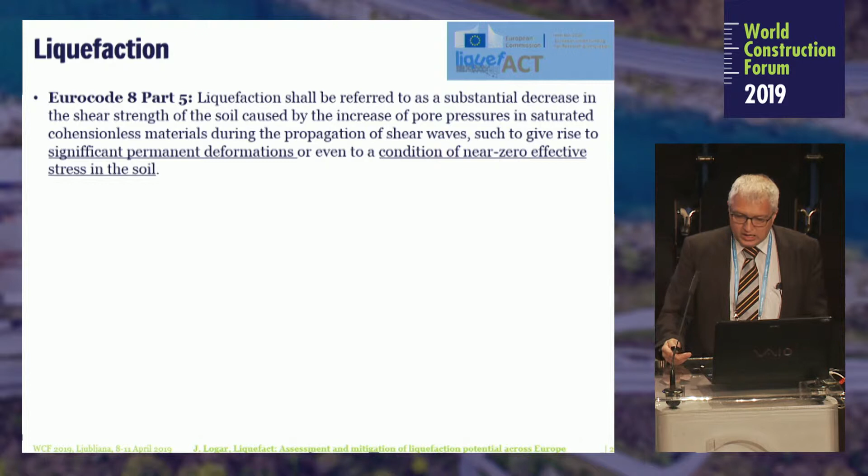As civil engineers, maybe we should look to the Eurocode for the definition of liquefaction. The Eurocode says that liquefaction shall be referred to as a substantial decrease in the shear strength of the soil caused by the increase of pore pressures in saturated cohesionless materials during the propagation of shear waves. Basically, in most cases this is an earthquake, giving rise to significant permanent deformations, which we'll see on the figures later, or even to a condition of near zero effective stress in the soil, meaning that soil literally becomes a liquid, maybe just for a fraction of time.

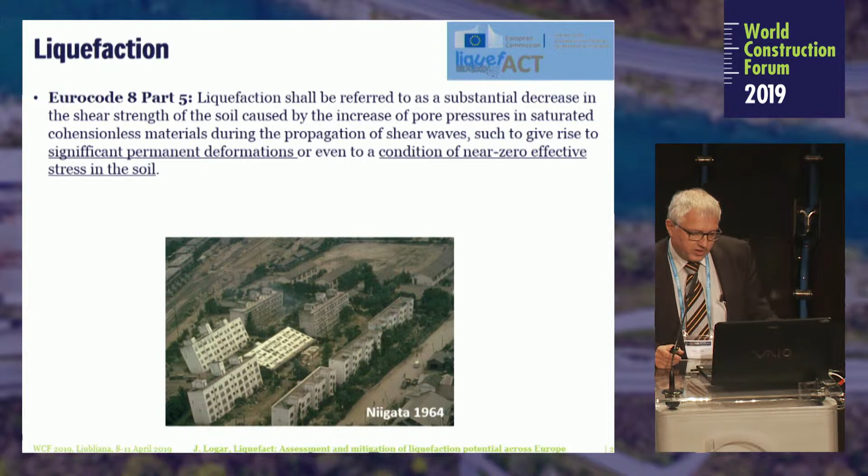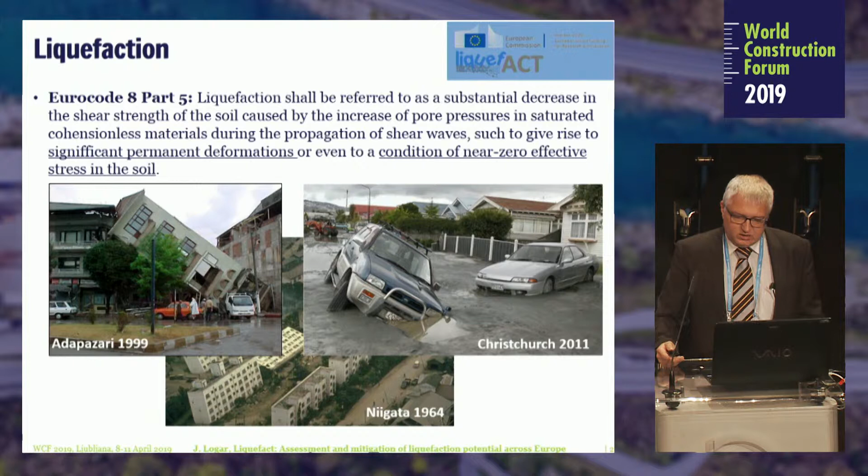Maybe this is one of the most known photos of liquefaction phenomena, from the Niigata earthquake in Japan in 1964, but we have more cases from recent earthquakes. For instance, maybe the most known and most investigated is Christchurch in New Zealand in 2011, then Turkey, and there are other liquefaction manifestations during recent earthquakes, for instance in Hokkaido Japan, in Fukushima Japan, in Emilia-Romagna Italy in 2012, and maybe you have observed the dramatic liquefaction phenomena in Palu, Indonesia during the Sulawesi earthquake last October, or end of September maybe, where literally a flow of liquefied soil demolished a large area in Palu.

It is a devastating event.

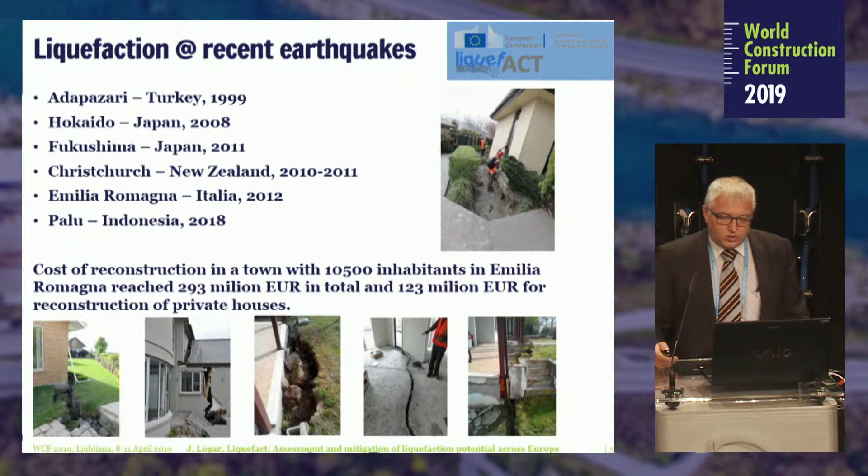Just as a case, in a small town with over 10,000 inhabitants in Emilia-Romagna, the reconstruction costs reached nearly 300 million euros in total, or over 120 million just for the reconstruction of private houses. So the cost of such an event, or the damage, is huge, and what does the damage look like?

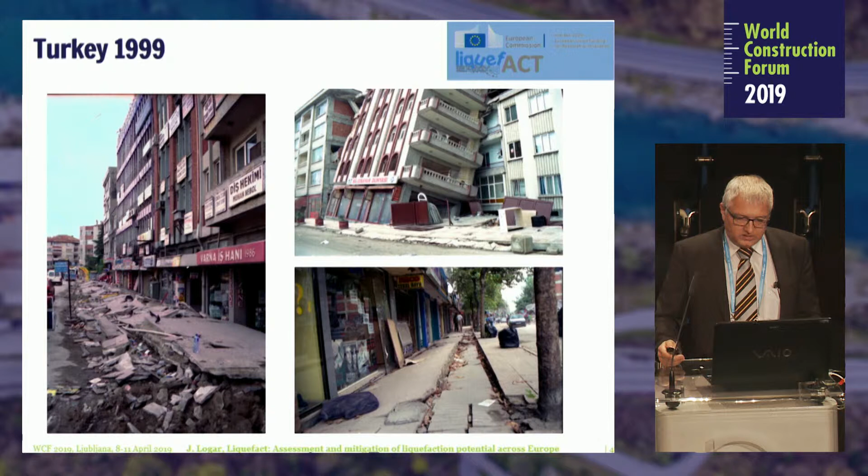So it's basically tilting, overturning of buildings, it's settling of buildings, and it's heave of the ground adjacent to buildings. And here you have always a man standing in front of the houses, so you can see how large settlements can occur.

during earthquake. So more than enough motivation for the LIQUEFACT project, whose goal is to develop a comprehensive understanding of liquefaction disasters and applications of mitigation techniques, those already available and some new ones being developed, and, as I will show you, to increase community resilience to earthquake-induced liquefaction disasters.

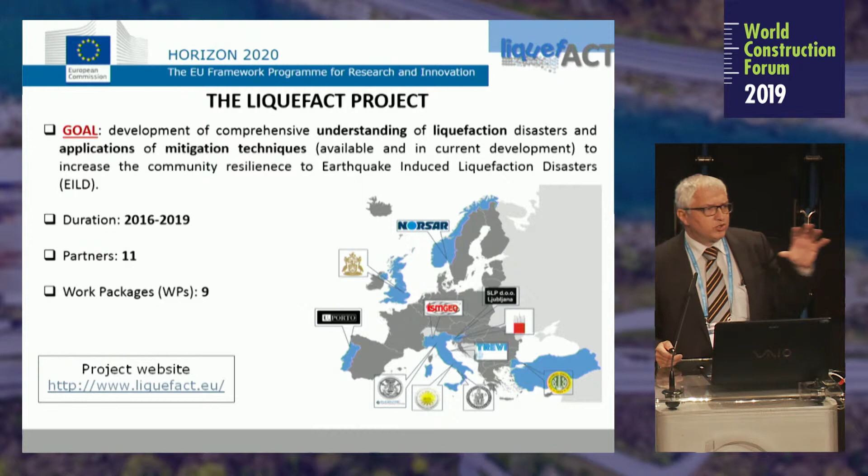So the project started in 2016 and will be completed in October this year. It involves 11 partners from Norway, UK, Portugal, Italy, Slovenia, and Turkey, and it is organized in 9 work packages. I'm going to briefly present the 6 technical work packages.

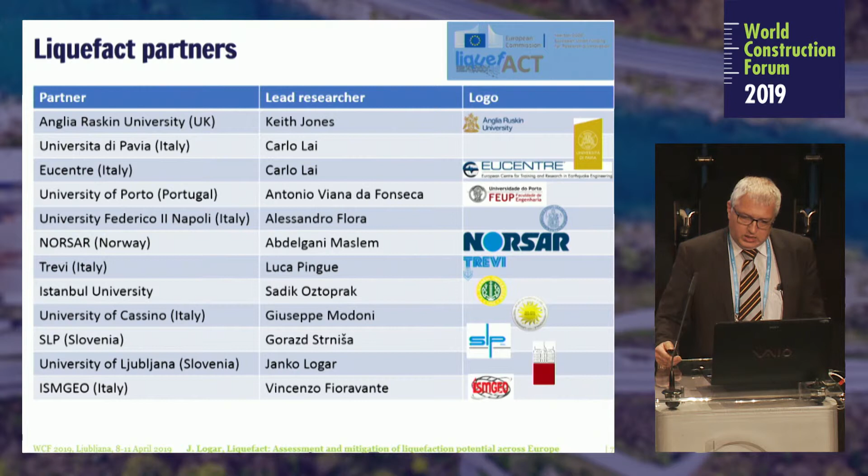Here are listed all the partners with lead researchers, so if you look for publications coming from this research, you can use this list. The sequence of work packages is such that the first deals with hazard, then with the vulnerability of structures, and so on. So let's go through.

The first technical work package deals with the European liquefaction hazard map, so the macrozonation process on a European scale, and methodology for localized assessment of liquefaction potential on a local scale.

In the framework of this work package, ground characterization on 4 different sites in Europe was performed: in Emilia-Romagna region in Italy, in Lisbon area in Portugal, in Brežice area in Slovenia, and Marmara region in Turkey. One of the tasks was also to produce a catalog of historical liquefaction occurrences in Europe, and then a European liquefaction hazard map is being produced. A validation of this map will be done for the 4 investigated sites within the project.

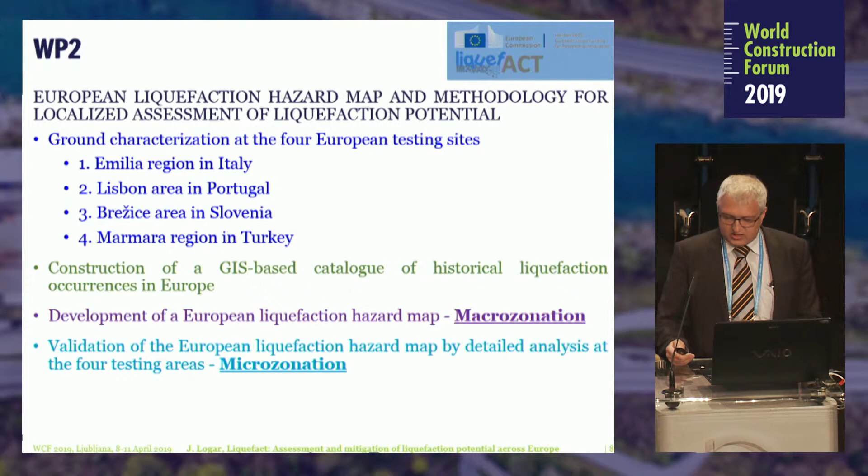So this is a map of historical liquefaction occurrences in Europe. Probably it's not surprising what these dots are, but maybe it's interesting to observe that liquefaction can occur at magnitudes as low as 4.5, and we have many evidences at earthquakes of magnitude around 5 to 5.5.

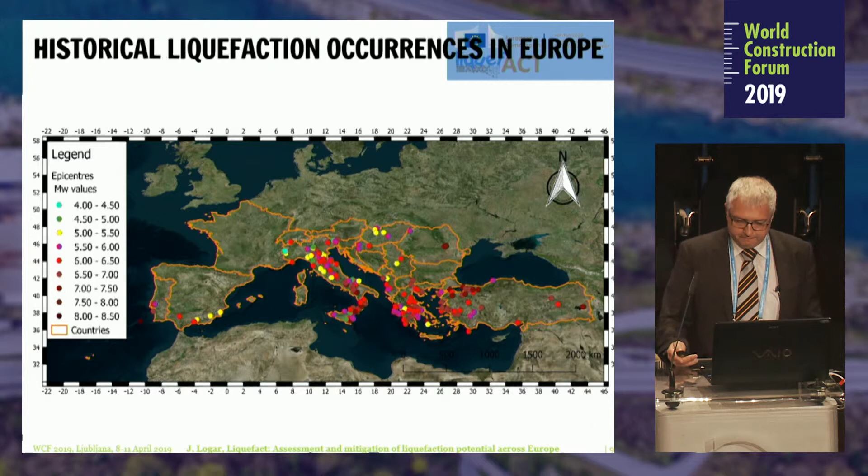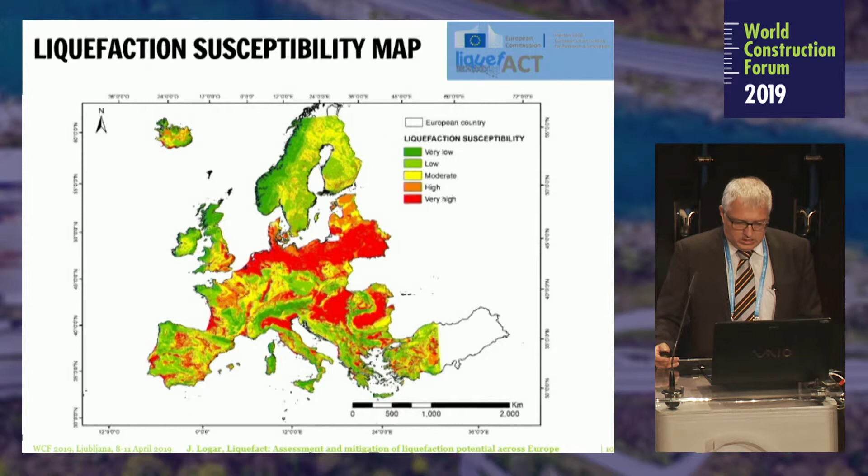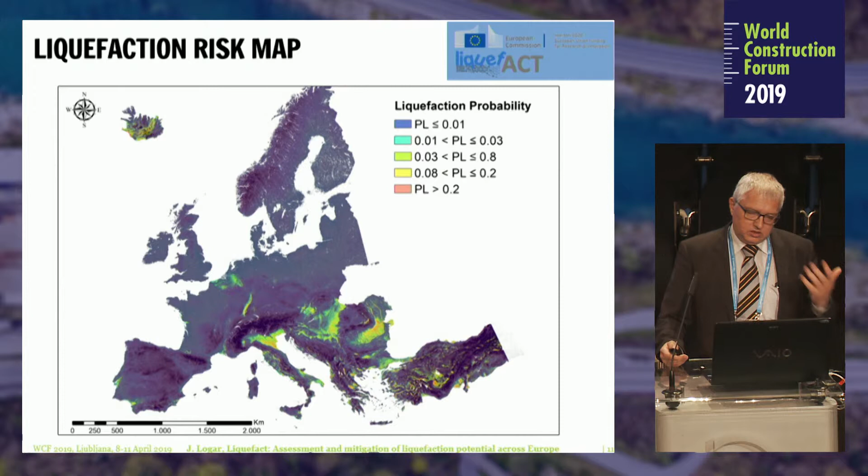One of the outcomes is also the liquefaction susceptibility map. This map does not involve the earthquake hazard, it's just the susceptibility of the ground. And here, if we combine the seismic hazard with the liquefaction susceptibility map, we get something like this. This is not the final version; the methodology is still being worked on and improved, so the final version will probably look a little different, but nevertheless, the higher liquefaction probability is shown in places where evidences of previous liquefaction manifestations were found.

Then the microzonation is done for the 4 sites in such a manner, so maps will be produced in terms of liquefaction potential index or liquefaction severity number as indicators for liquefaction.

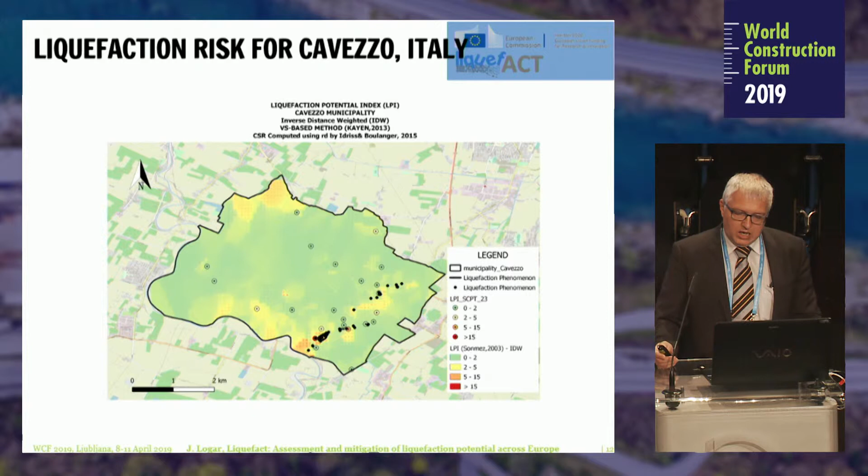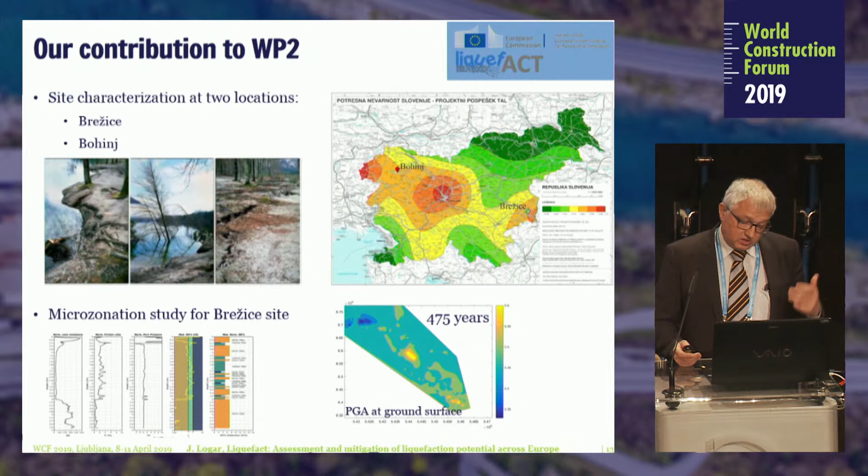Our contribution, the Slovenian contribution to work package 2, was the site characterization at 2 locations in Brežice and Bohinj, where we investigated ground potentially susceptible to liquefaction. In the Bohinj case we had a hypothesis that in the recent earthquake, the crack along the lake shore was produced by liquefaction, which turned out to be very unlikely. And then we have done, or are doing, the microzonation study for the Brežice site.

The next work package deals with structural liquefaction resilience and vulnerability assessment methodologies. The main objectives and tasks are to develop efficient numerical procedures for the simulation of liquefaction-induced damage in critical structures and infrastructures.

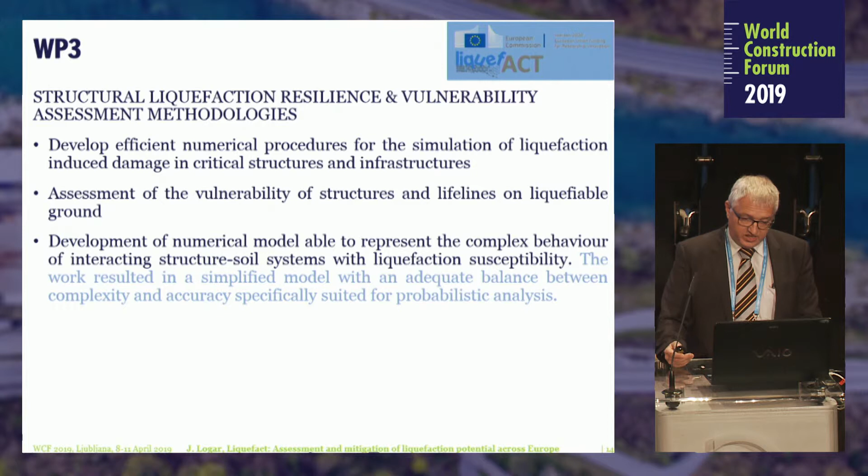The assessment of the vulnerability of structures and lifelines on liquefiable ground, and development of a numerical model able to represent the complex behavior of interacting structure-soil systems with liquefaction susceptibility. So basically, the vulnerability of structures was being studied.

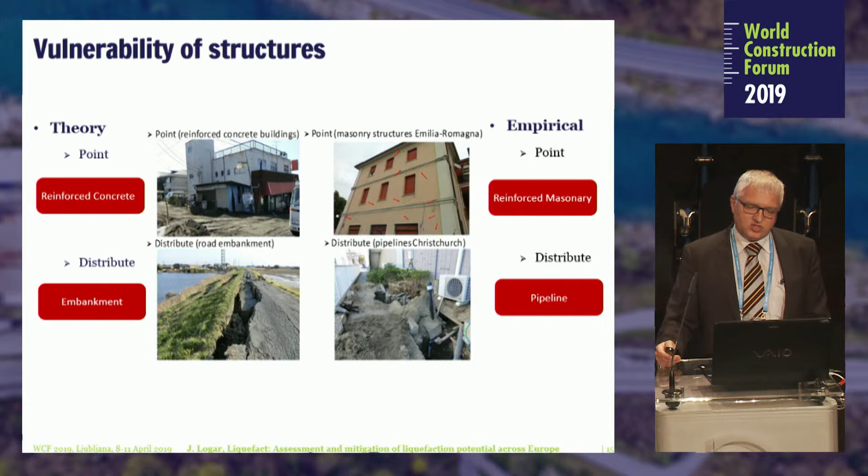Mainly four types were studied: two structures, reinforced concrete and reinforced masonry, and linear lifelines, so embankments, traffic lines, and pipelines. The reinforced concrete structures and embankments were dealt with theoretically or numerically, while the masonry structures and pipelines had their vulnerability to liquefaction assessed by empirical evidence coming from the Emilia-Romagna region for masonry structures, and from Christchurch for pipelines. I'm afraid I'll have to skip this one.

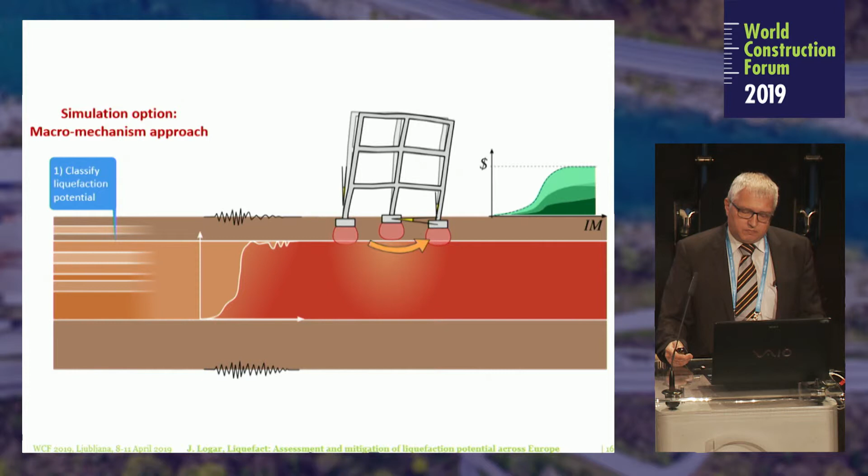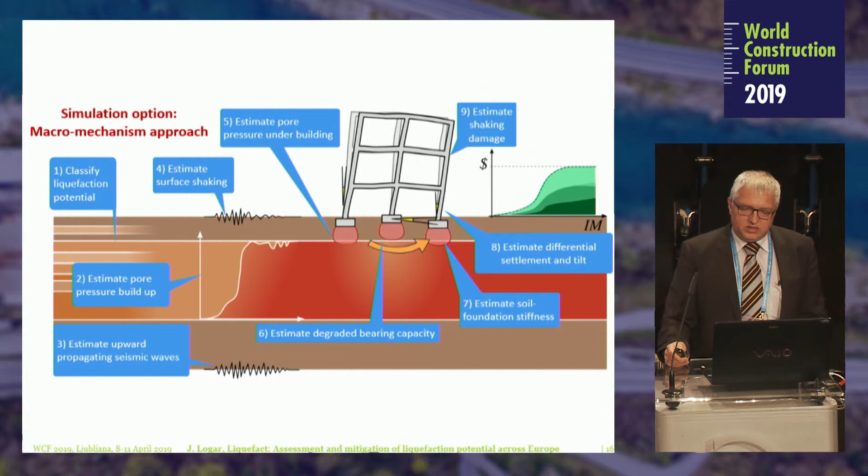One of the tasks that required the most time from the researchers of University of Porto, who led this task, was to come up with a macro mechanism approach to study building behavior or vulnerability of buildings on liquefiable ground. So they distributed the task into sub-models or macro models in order to arrive at the fragility of structures on liquefiable ground.

Our contribution to work package 3 was to assess the vulnerability of traffic embankments on liquefiable ground, and structural colleagues designed a simplified method for rapid risk identification of soil liquefaction and structural damage, using response history analysis and a simplified nonlinear model. It is a relatively simple model, but with nonlinear ground response and nonlinear building behavior, and the aim is to make a rapid assessment, to answer the question: do we have to study this structure in more detail or not?

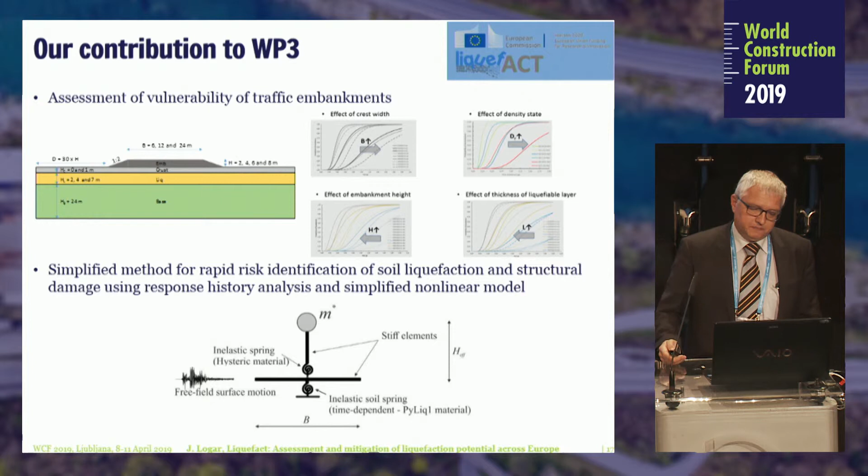Work package 4 deals with mitigation measures, and I like this work package most, although we don't participate directly. The colleagues from University of Napoli Federico II, exactly where our keynote speaker comes from, studied treated soil in the laboratory on samples, in small-scale centrifuge tests, and in full-scale trials on a selected test site in the Emilia-Romagna region.

And then, of course, some numerical work was done to combine all the results into a single set of conclusions. The studied liquefaction mitigation techniques were horizontal drains and induced partial saturation as new developments, and vertical drains as an existing popular measure to counteract liquefaction risk.

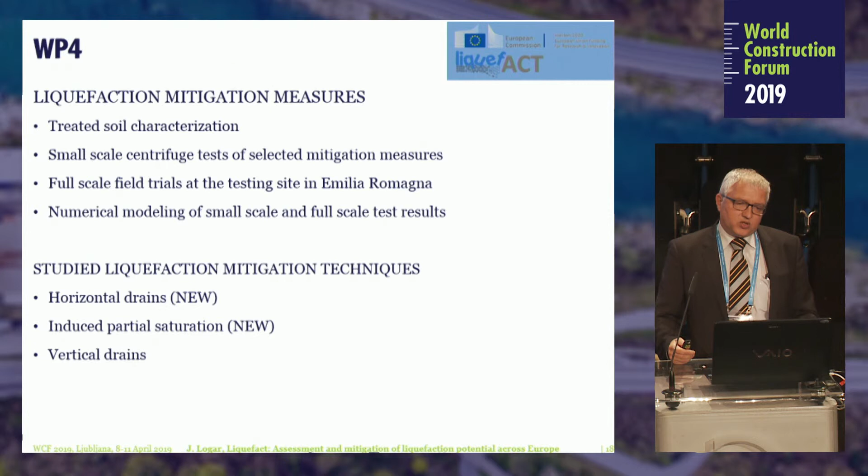Why these new methods? Because we have a lot of existing structures, and it's extremely difficult to apply any conventional mitigation techniques under existing buildings. But horizontal drains can be installed without affecting the building, and also induced partial saturation. What does that mean? It means insufflating air bubbles into the ground to make the pore water more deformable, so less stiff, and hence reduce the highest possible pore pressures developed during an earthquake event.

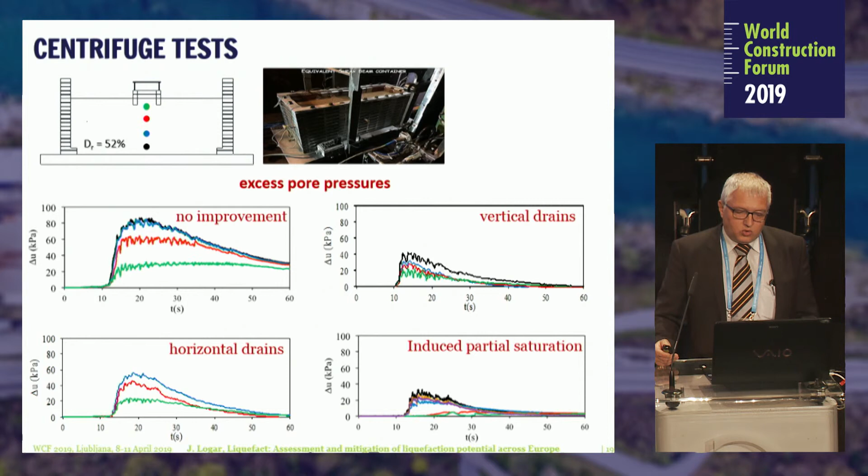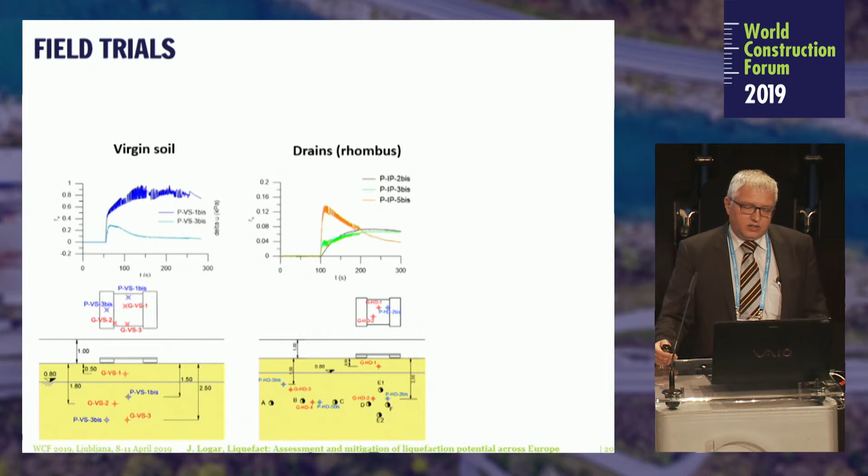In the centrifuge tests, the colleagues investigated the influence of vertical drains, horizontal drains, and induced partial saturation. You can see on this graph that all the measures are effective, though of course each has its own weaknesses and strengths. Then in the field trial, virgin soil was tested again.

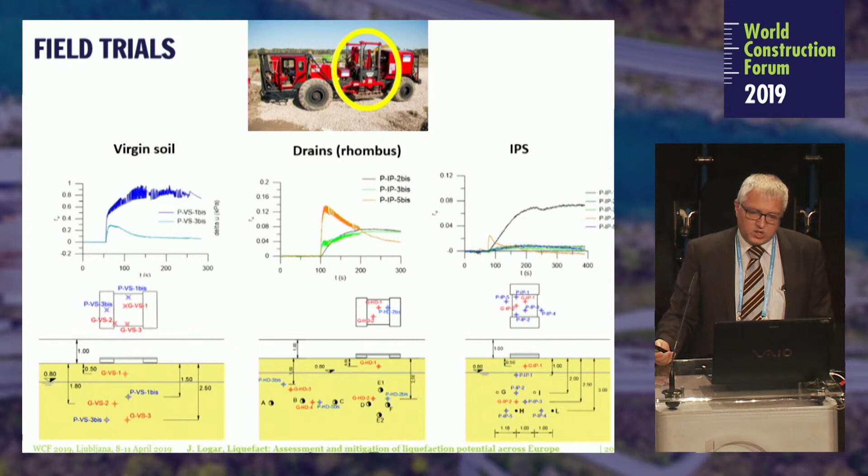You can see that a relative pore pressure equal to 1 means liquefaction, and considerably lower numbers result with drains, with horizontal drains, and with induced partial saturation. How was this done? Using a mega shaker, a machine capable of inducing vibrations in the ground in order to provoke liquefaction or increase pore pressures.

The next work package deals with the economic part and the consequences of an earthquake-induced liquefaction event, and then the costs and benefits of installing some mitigation measures.

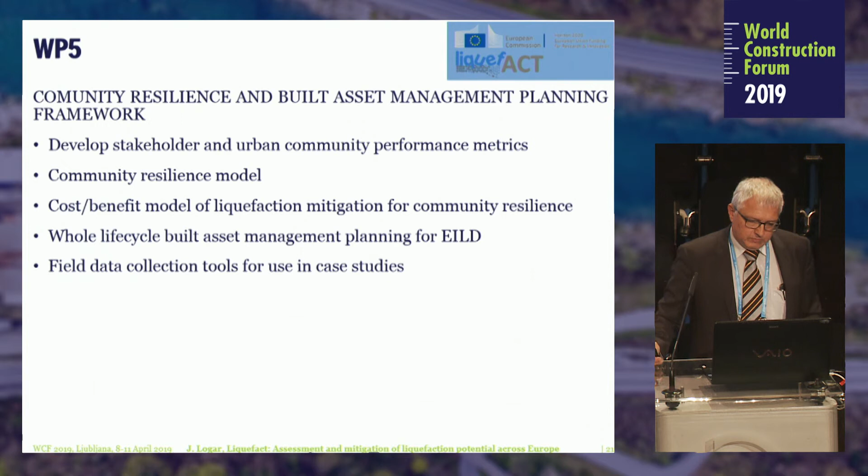Work package 6 will produce liquefaction mitigation planning software, integrating all the developed methods into a single toolbox, which will be available to researchers dealing with liquefaction. This software will be able to assess hazard and risk, and will assist in planning mitigation measures, considering physical, economic, and social impacts in terms of risk.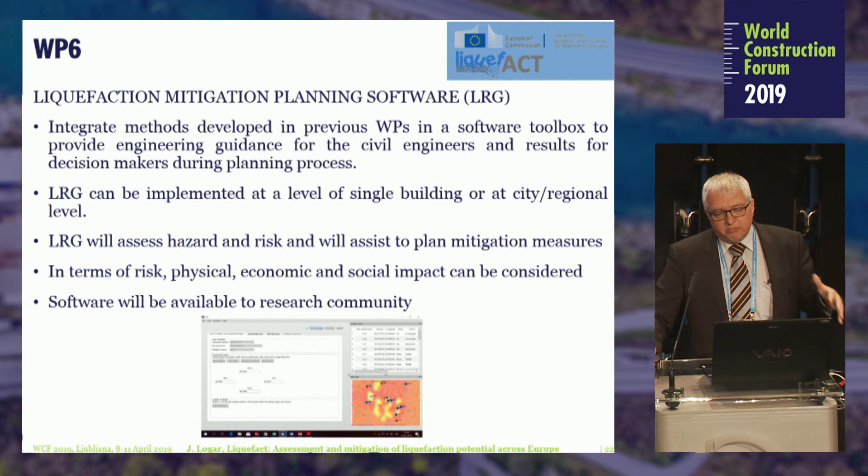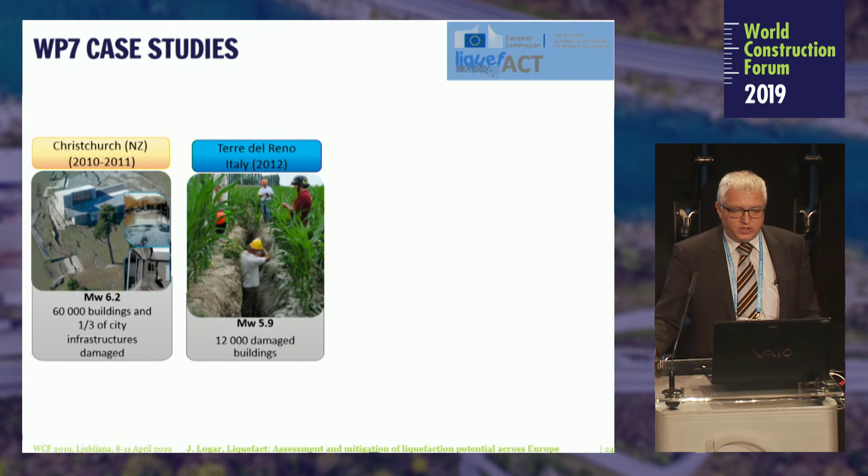Work package 7 will validate everything based on case studies, where a lot of evidence has been collected — in Christchurch, Terre del Reno, Urayasu in Japan, and Adapazari in Turkey.

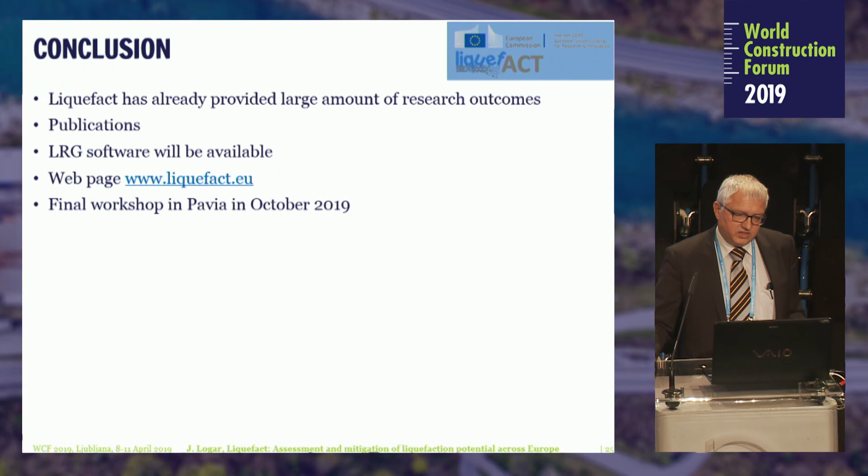To conclude, I believe that LIQUEFACT has already provided a large amount of research outcomes, so everybody interested in this phenomenon is welcome to read the publications coming from the research group, to download the software when it becomes available at the end of the project, to visit the web page, and maybe to participate in the final workshop, which will be held in Pavia in October this year.